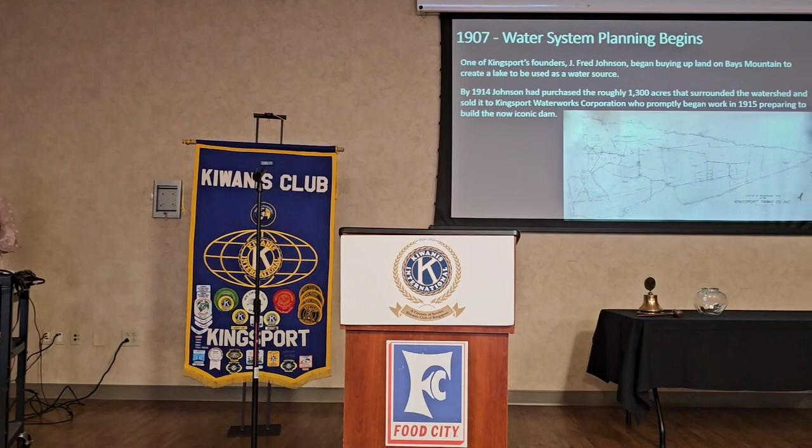So I've been with the city 25 years, but the city water department started back in 1907 when J. Fred Johnson, one of our city founders, started to purchase property and buy 1,300 acres of land up on Bays Mountain for a water system.

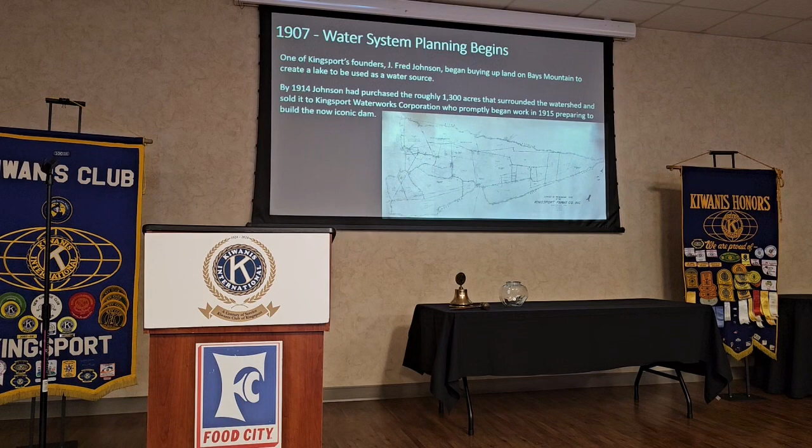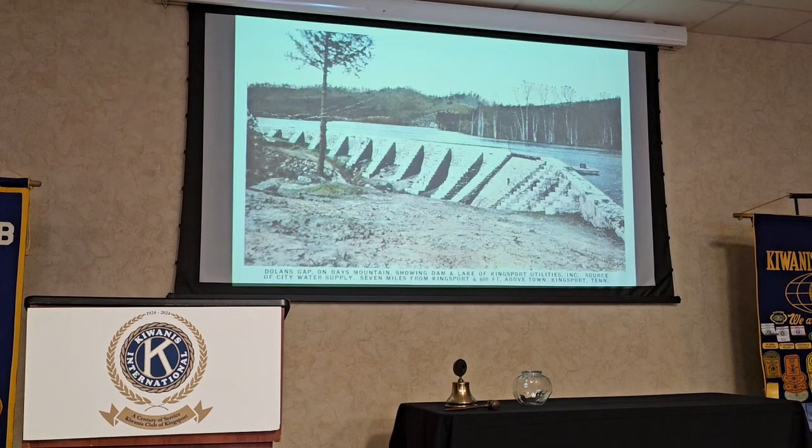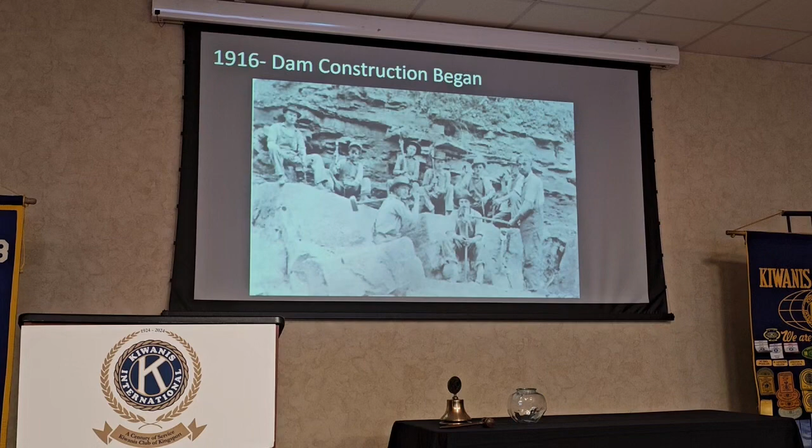Going back through old articles, it was mostly due to the wells down here in the city, and a lot of those were going bad and wasn't sufficient water quality. So they started looking up on the mountain for a good water source, and so they surveyed the area between Bays Mountain and the Holston River Mountain, and did the convergence. That's how they decided where to put the dam there at Dolans Gap.

And that was the Kingsport Waterworks Corporation. It took them 2 years to build the dam. The first year they built the dam, and then the second year they decided to come back and started putting these abutments in. It's been said that it took them 2 years to do that.

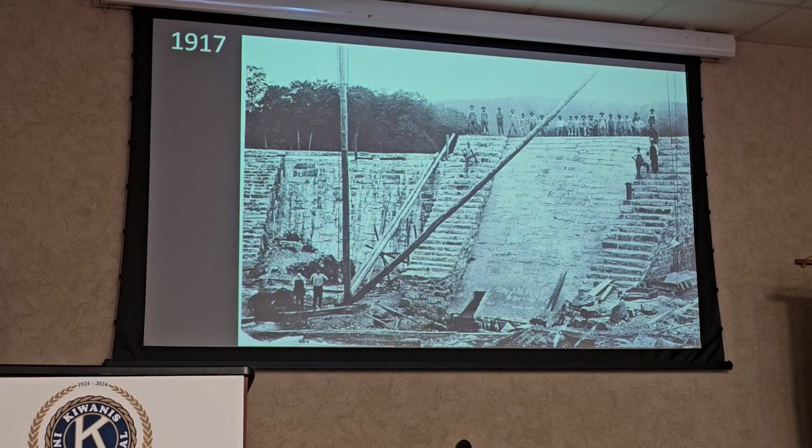That was in 1916, and then in 1917, water began flowing down from Bays Mountain in a 10-inch pipe down to Kingsport. Part of that 10-inch pipe is still in service. We actually had a repair on it about a month and a half ago, so we do have infrastructure in our system that is that old. So 4 months later, after the water began to flow, the City of Kingsport was incorporated.

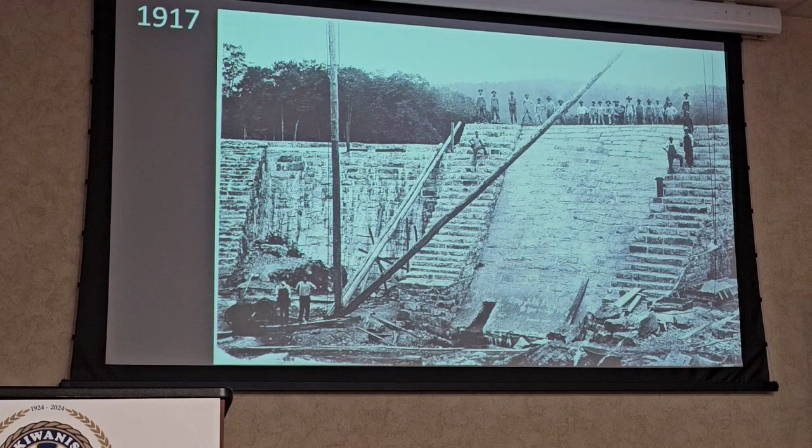The dam is about 600 feet above the City of Kingsport, and the lake is 35 acres. They had a series of pressure-reducing valves coming down the hill, so you can imagine the amount of pressure 600 feet above and what the pressure would be at the bottom. So they had a series of pressure-reducing valves to moderate the pressure. And I don't think that was super reliable for them. They would have days where they would have a whole lot of pressure and days where they'd have very little pressure, and then other days where they'd have no water at all. So it's a far cry from where we are today.

In 1919, due to taste and odor issues, the first water plant was constructed on Bays Mountain. It was about 345 feet below the dam.

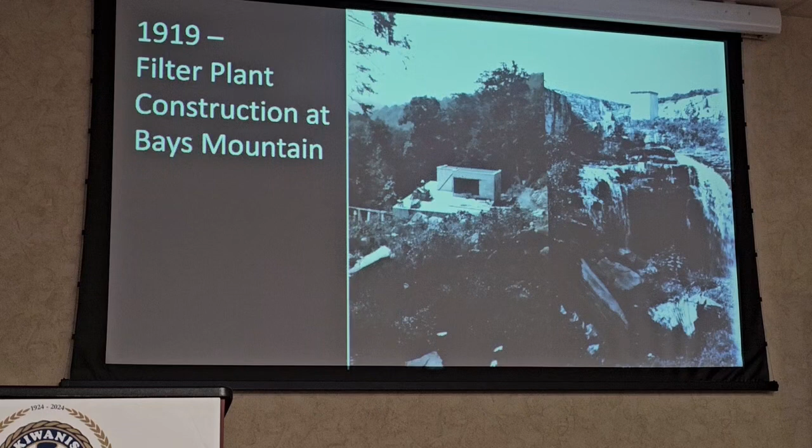Reinforced concrete, it was 3 stories high. Filters could filter about 1 million gallons a day, and it was said to have enough supply for 3,000 people. So speaking of horsepower, it took 63 tons of reinforced steel and 10,000 bags of concrete.

All of that came up the mountain through horsepower. So how many horsepower do we have here? What was that, 44? 44 horsepower.

So it was also interesting. I really had a hard time. I did a presentation on this about a month ago. But when I was putting this presentation together, I really had a hard time getting off the mountain and down to the water treatment plant because I just had all these articles that you would read through.

It was so interesting. So there were several residents that lived up on the mountain, and a lot of them would just pitch in and help during the dam construction. It was said that those folks used their horses and mules to help get the stuff up the mountain. It's a lot to say that back in 1916, 1920, having running water was a luxury, and now it's taken for granted.

It was said that this was the most difficult part of the dam construction. There were 2 operators on the mountain, Robert Rufus Nelms and his wife Ruby lived there, and Ruby's father G.A. Barlow all lived up on the mountain, and they actually had a cabin up there. That was not uncommon all the way up probably to the 1950s, 1960s. It wasn't uncommon for operators to live at the plant so they could monitor it and start the plant up during the day and shut it down in the evening.

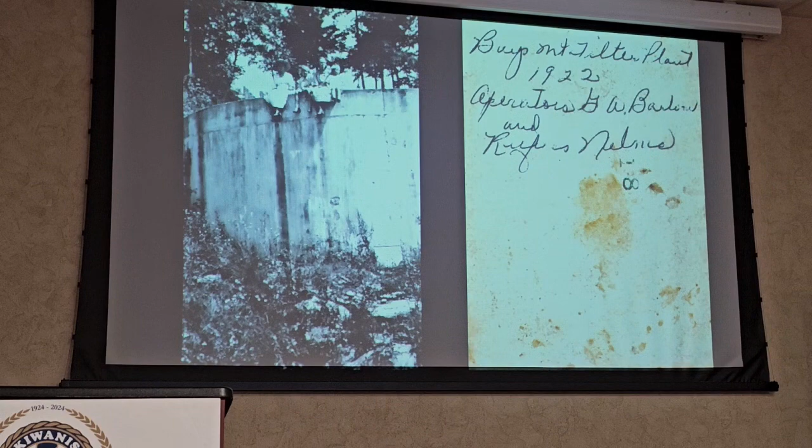Again, the old pictures to me were super interesting. So this wash water tank, that's how you backwash filters. You got to clean the filters once the water goes through. Backwash is utilized to clean the filters.

I can't imagine what it must have been like to live there during this time with the number of people that were there. What a great opportunity that would be. We pay big money for that now.

So in 1926, Kingsport Waterworks sold the water system to the city of Kingsport for $300,000. Weidman and Singleton did the engineering for it. At the time, we had 1,200 customers, and by 1928, we added an additional 800 customers.

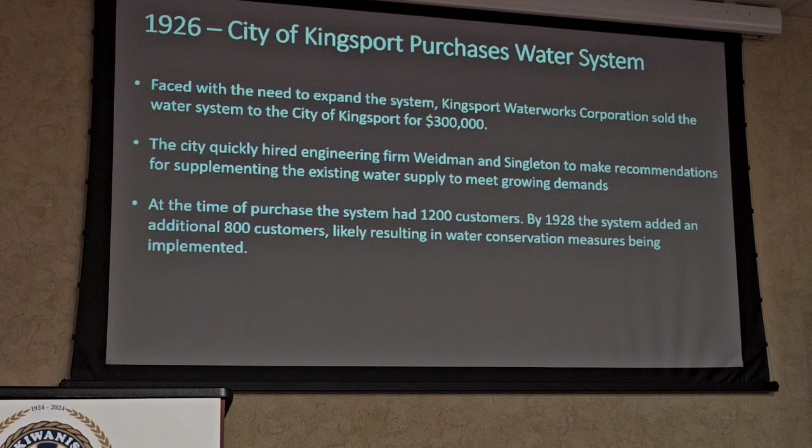A lot of the old news reports recorded a lack of water. There would be days where we would have to do water conservation. I ran into an article from 1925 that referenced back that we hadn't had to have a water restriction since 1925. This was a big deal, that's a lot of growth.

What's interesting to me was the amount of public involvement that they had. They had a meeting at the Y. They did a presentation, everyone voted on it, and they said yeah, this is absolutely a go.

Part of that new expansion, the new plant, would be a 1 million gallon water storage tank. We call it Cemetery Hill, but it's at Oak Hill Cemetery. There's a water storage tank on Oak Hill, and it's still there today, and we still utilize it, though it's been rehabbed a couple of times. We're still utilizing that same infrastructure that was put in 1928.

Capacity was 2 million gallons. Also, if anybody is a big history buff and aware of anything about this, Borden Mills donated the land to the city for the water intake. They had mentioned building an emergency intake, an emergency water treatment plant at Borden Mills, but I couldn't find any other reference to that other than in one article. So if someone is aware of something like that, definitely let me know, because I had never heard that before.

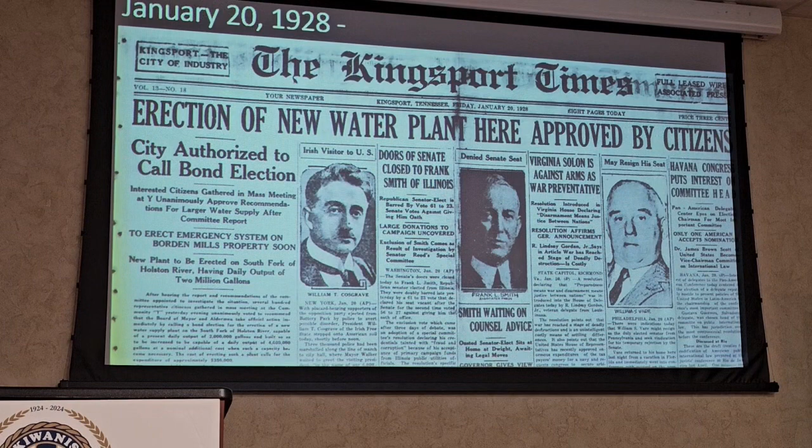So in 1928, construction began. The project was split into nine bids. That was very interesting. What was even more impressive to me, there were 45 bidders on this project. I don't know how many people do construction in here, but our last large construction project, we had 2 bidders, and it was for $6 million. And so you're looking at $400,000 worth of work, the plant was $400,000, and there were 45 bidders. So that was super interesting.

Also interesting enough, beautiful, it's amazing to me. It goes back to how important water was when water plants and distribution systems and getting water to people's homes first began. There was a lot of pride taken in that, and you can see that in the construction of the plant, the arched windows, the filter controls were marble. If you go to places like Nashville and Omaha, it's absolutely architectural, it's beautiful. You don't get that now, it's too expensive. Now when you do get a plant, it'll be a membrane plant, typically a steel building to keep costs down. But I think that's amazing to me.

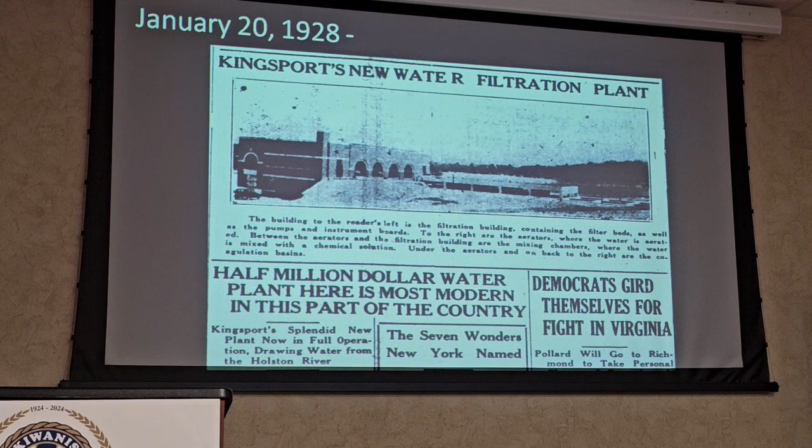Also, when I do this presentation, I struggle with it. I love what I do, and I love water, and I have a hard time making it interesting to other people. So, matter of fact, in my last presentation, they thought this was going to be like watching paint dry. So hopefully that will not be the case for you.

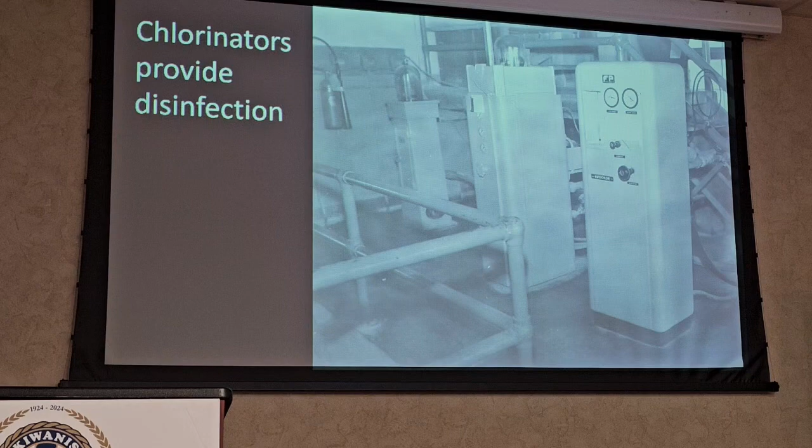I'll just go through a series of pictures here. These are our first chlorinators. This is how you feed chlorine here in the plant. Those are no longer there.

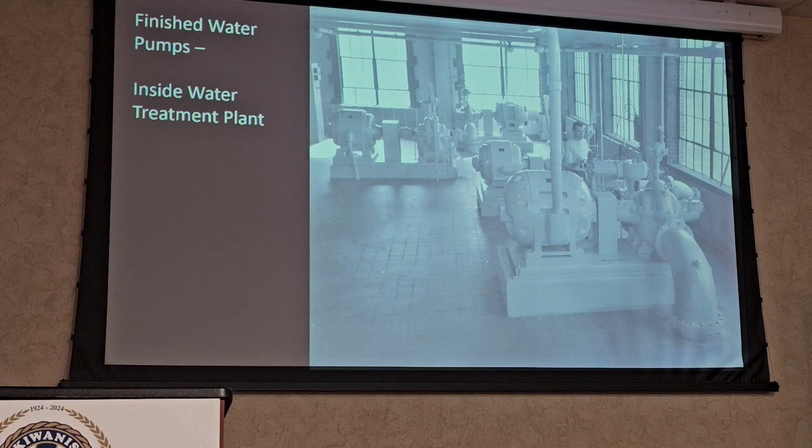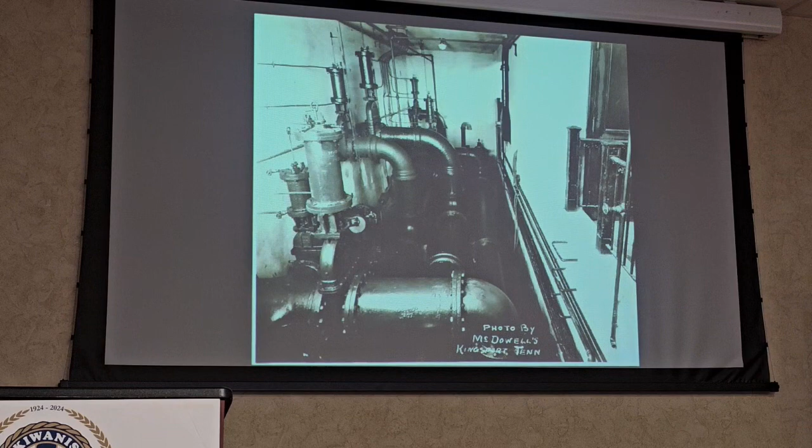And those pumps there are distribution pumps. So once the water was treated, those pumps there were used to pump water into the system. This is a filter gallery. Not all of that equipment, but a lot of it was there when I started in 1998. All those pipes are still there, but some of the other apparatuses aren't there.

So in 1943, there was another expansion. Again, it was just in time. We had to get the War Production Board to approve a request for materials needed for the plant. It took almost a year to get that approval. If they hadn't gotten it when they did, there would have been water shortages that summer.

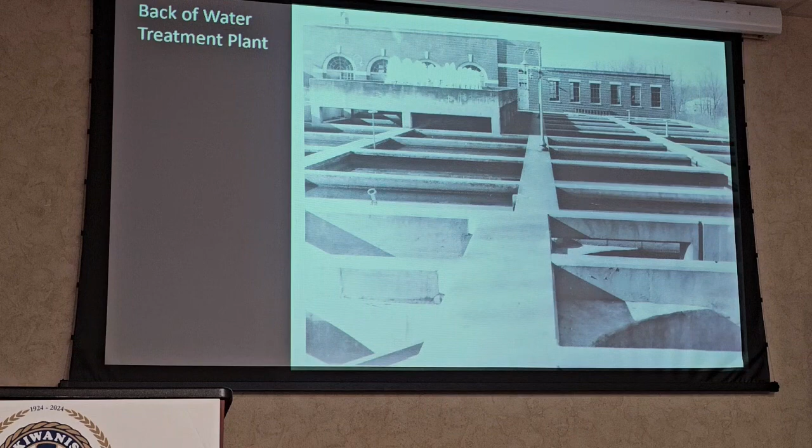Again, these are just older pictures from the water treatment plant. There's the aerators in the back during that time.

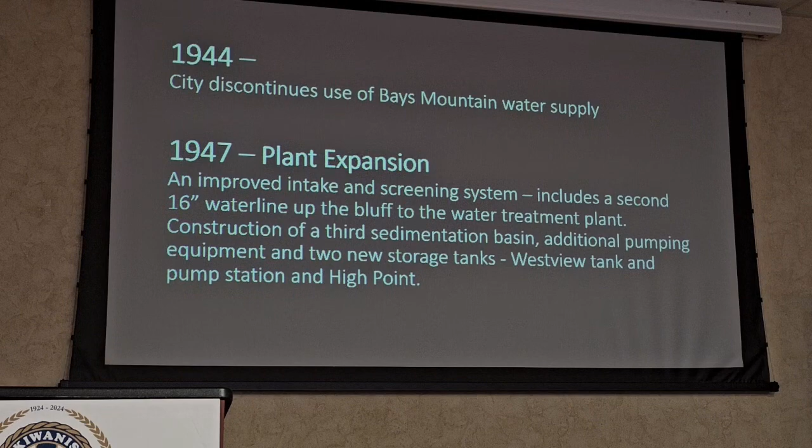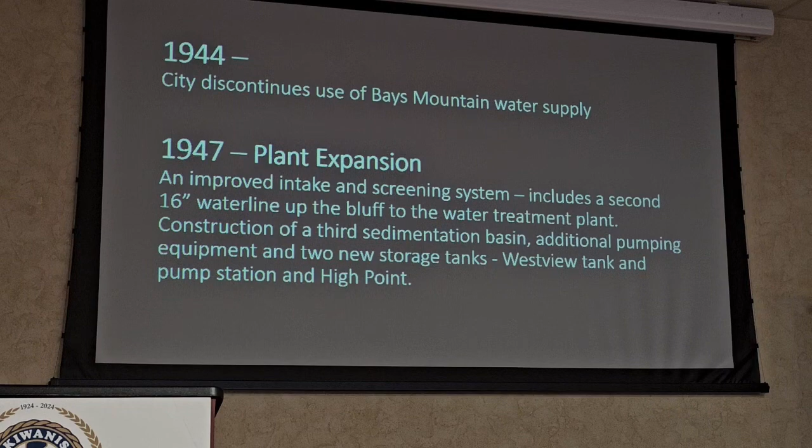So in 1944 is when we discontinued use of water from Bays Mountain. We did yet another expansion, adding a second 16-inch water line, the raw water line coming up the bluff to the water treatment plant. When I came in '98, we were talking about a project to remove those pipes and utilize a different conveyance system, and we finally finished that, I think, in 2016. So there's construction of the Westview water tank. That tank is also still in use, we've done a couple of rehabs on that one.

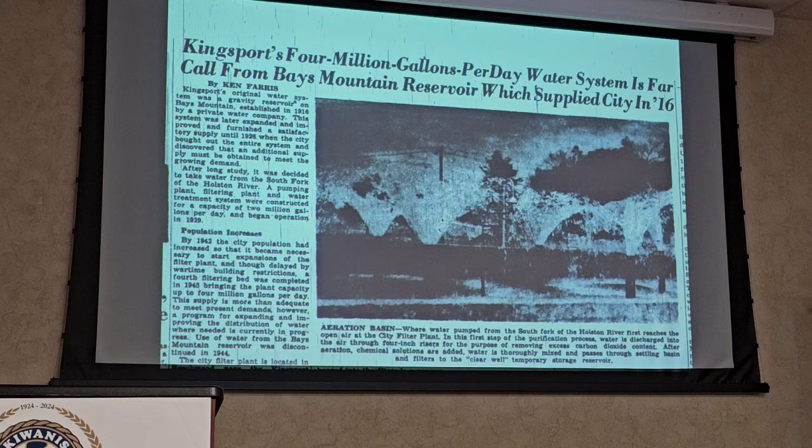There's two 16-inch lines, and then later in the 70s we added a third. But you'll see the project we did on that in 2016. That was a source of a lot of sleepless nights for us, because other pictures will show how steep that is. If we had had a break on that line, imagine how long it would have taken us to fix it.

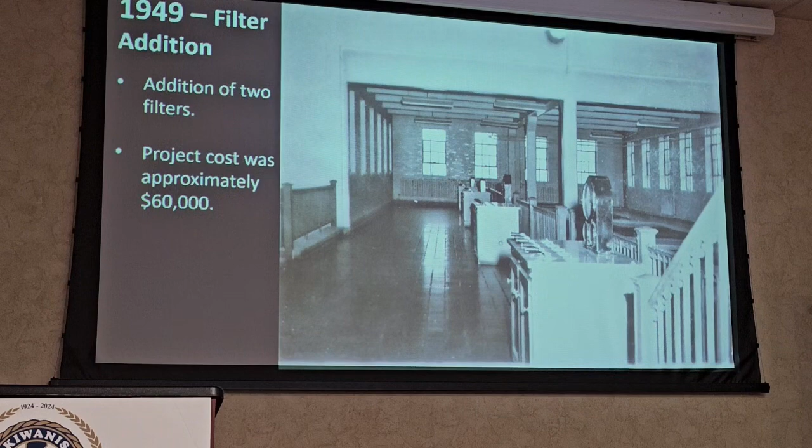Oddly, couldn't find any articles about it, but in the 70s there was a break there, and it took them 3 days to repair that waterline break. Also interesting to me, maybe not to you, the cost of these projects - $60,000 to add 2 filters, that's crazy. Things are so expensive now.

1954, we began adding fluoride to water. This was, at the time, one of the biggest city elections, best city turnout ever, and it was a controversial issue.

From the 60s, I guess, until 2016, it was just a series of improvements - adding a pump station, adding a filter. I tell everybody, now I know what you guys feel like when people like me talk about this, I was like, that's super boring. You added another filter, you added this, but it's all very much needed, it's just kind of repetitive. But again, they did an expansion at this time.

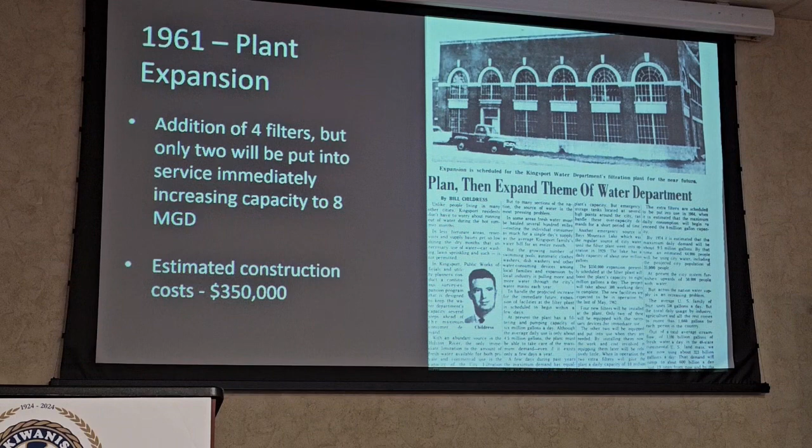In this 1961 article, the United States was using 323 billion gallons of water a day, and it was estimated that in the year 2000 it would reach 880 billion. But a quick Google search shows that we're only using 408 billion. So again, either conservation measures or really bad estimating.

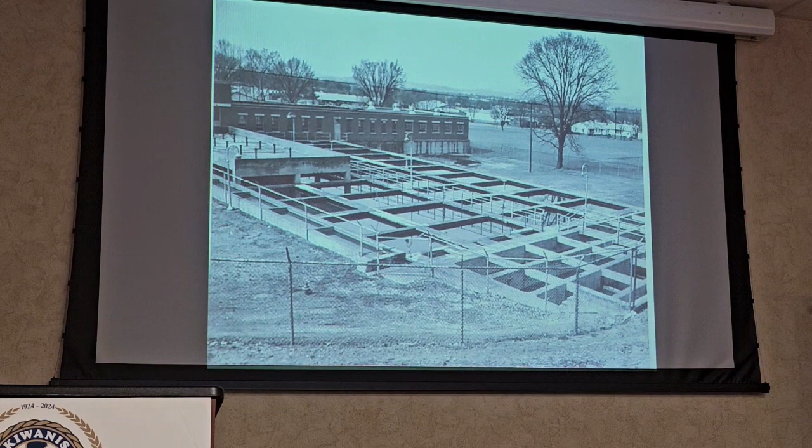So in the 1970s, we grew quite a bit, mostly due to acquisition of smaller utility districts. We had, I guess, about 6 utility districts that we took over during this time, and so we had to do additional improvements for that.

Again, there's the 30-inch raw water line that we added, sedimentation basins, filters. It was really the way Wiedeman and Singleton designed the plant - they always made sure they were able to expand. I think it was during this expansion they expanded it to add 4 filters, but they only put 2 in, knowing they could put the other 2 in when the demand for more water increased.

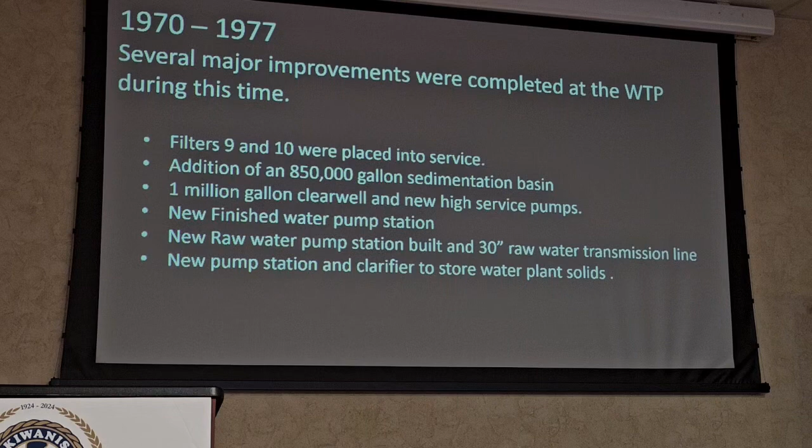So in the 70s, we were using an average of 7 million gallons a day. We had 225 miles of water line and 12,000 customers.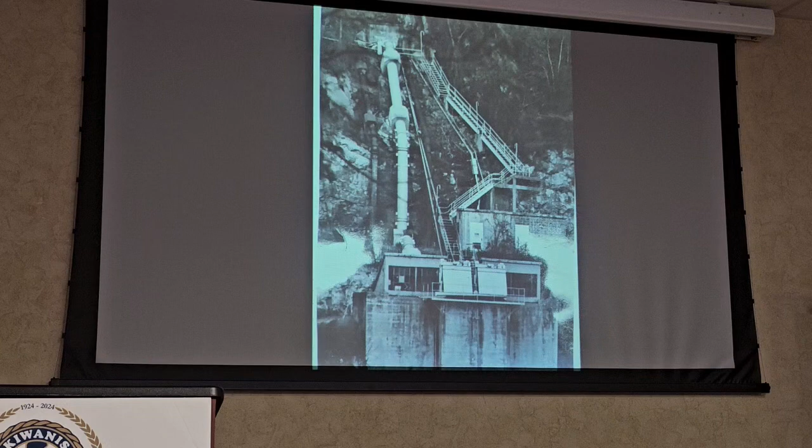Okay, so in the 1980s, yet another series. You can see the construction costs, we're at $2 million now. Different types of capital improvement projects, but the cost is increasing for the same type of improvements. In the 80s, we're pumping 12 million gallons of water, 19,000 water customers, and we have 15 water storage tanks.

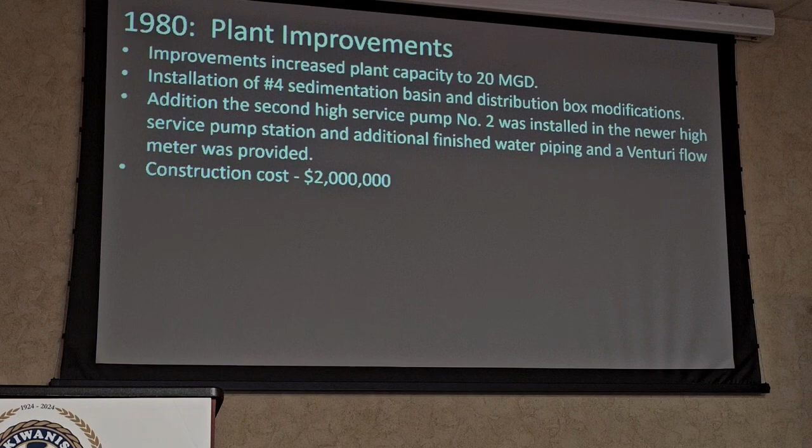Another expansion, I get it, this is boring, so I'm going to clip through this. I don't even have anything exciting to say other than we continue to... actually, that's not true, it's not exciting, but that's part of the problem with water and sewer. It's not exciting, you don't care as long as you turn it on and flush it and it goes away.

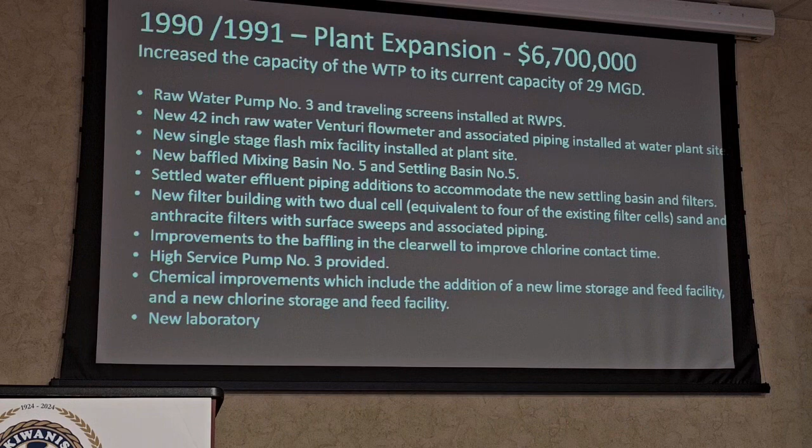So I will say that it gets very exciting when some of those things don't work. I shouldn't go through all the expansions, but to Kingsport's credit, they were always looking forward, always reinvesting, so that we were always ready for whatever was coming next. We've never found ourselves in a water shortage or some of these issues you're seeing hit the news these days. So it is boring, but it is extremely important.

Those are sedimentation basins. I did this presentation just on the history of how we progressed from 1907 to current day. I didn't go through the treatment, but these we call sedimentation basins. Once the water comes through, you mix the coagulant with it, and it kind of works like making a cake, put the cake batter in there. In the back you have flocculators, and it mixes it all up. Then when it comes through here, all your solids settle out, and all the clear water on top goes to the filters. So this is kind of the intermediate settling.

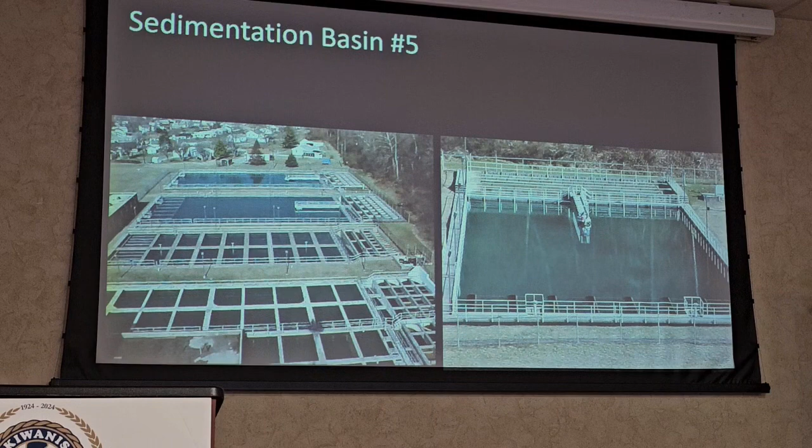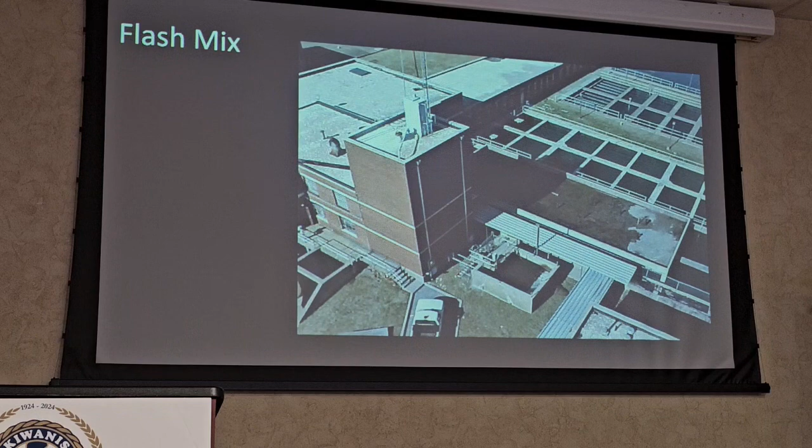And these are the raw water pumps and flash mix. When I came in '98, I thought that flash mix had been out there, that's where the mixers are, that's where you're making the cake. I thought that was always there. It wasn't.

So that's what the filter gallery looks like now. You can see the updated controls. I wish I would have took a picture of the old controls. We still have one, we kept one just so that people could see the marble stand and that sort of thing. I think when John was there at the time, you were required to make sure that we kept one of those.

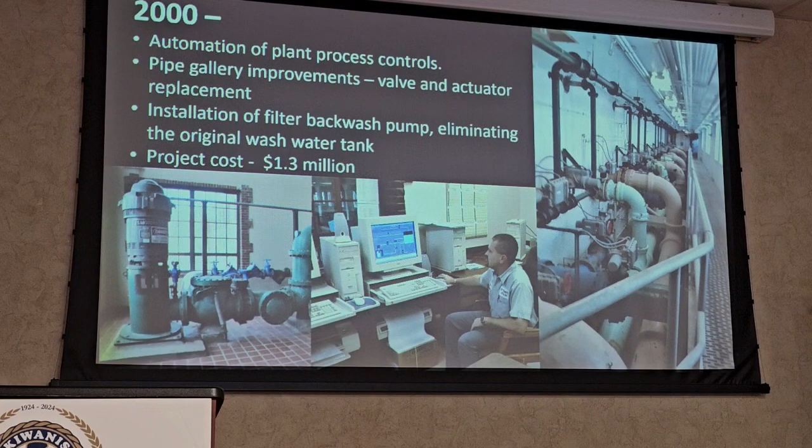In 2000, we really started seeing a lot of automation in water treatment. We just recently completed another upgrade in automation 3 years ago with SCADA, and you'll see a lot of that now. You probably hit the news a couple of months ago about cybersecurity - that's where all your risk is. Filter plant improvements, gallery improvements, and we did a huge residual projects.

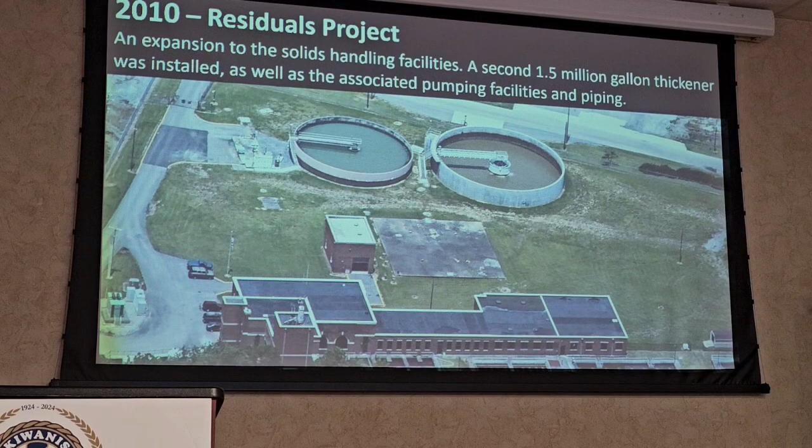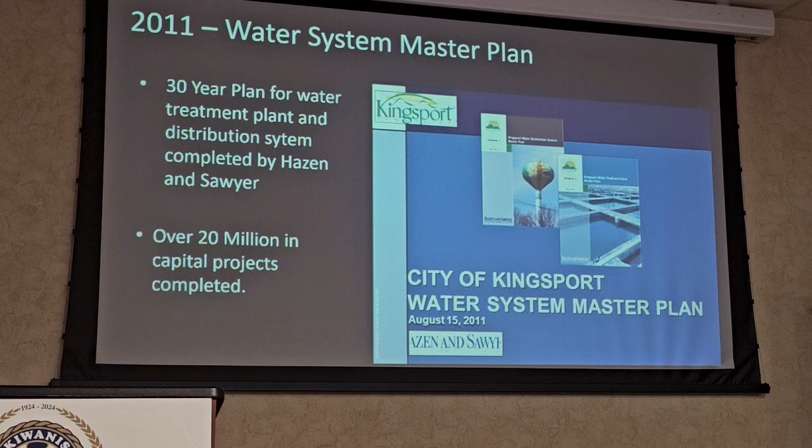2011. To me, this is one of the better things that I've been a part of since I've been at the city and a part of the utilities department. We did a water system master plan. We wanted to make sure we knew a lot of improvements needed to happen and they were coming. So we wanted to look at a 30-year projection, see what our population projections and demands were going to be, so that we went forward through our capital improvements plan without upgrading something in the middle that turned out to be the catch point for something that should have happened before. We went through this whole process. We're still utilizing it today, still doing projects out of it today. We're going to do a small upgrade or revision of the plan this year, go back, make sure we're still on track. But we've completed about $20 million worth of projects.

So this is super interesting. I don't care who you are. I don't care who you are.

So I showed you the raw water intake and the raw water transmission lines coming up the bluff under John B. Dennis over to the plant. Ron and I talked about this project for years. They were talking about it in 1998 when I came. Two studies, and then this was the first project out of the master plan. So we had to figure out how to get the water from the river to the plant with reliability, redundancy, and with as little risk as possible.

Essentially we had kept the same intake. We did a 24-foot vertical shaft, and the water comes into this shaft, and then we tunneled 1,100 feet under John B. Dennis, got away from the lines, and now it gravity feeds over to the water treatment plant, where we have pumps that lift it up at the water treatment plant. We have pumps there that have lifted it 130 feet from the ground, underground, up to the plant.

And then we added additional pumps. Again, reliability, redundancy - we've added a fourth pump. We have 4 raw water pumps. It takes 2 to meet our demand. So if we have one pump go down, we still have two there to help us meet demand, or if we have to take one out of service for routine maintenance, because you just never know. You could take one out of service, the other one go down, and it takes way too long. With the supply chain issues that we have now, nothing happens overnight. It will take us probably a year to get one of those pumps back. If we bought one today, it would probably take us a year to get that pump in. So the cost of this construction was $14 million.

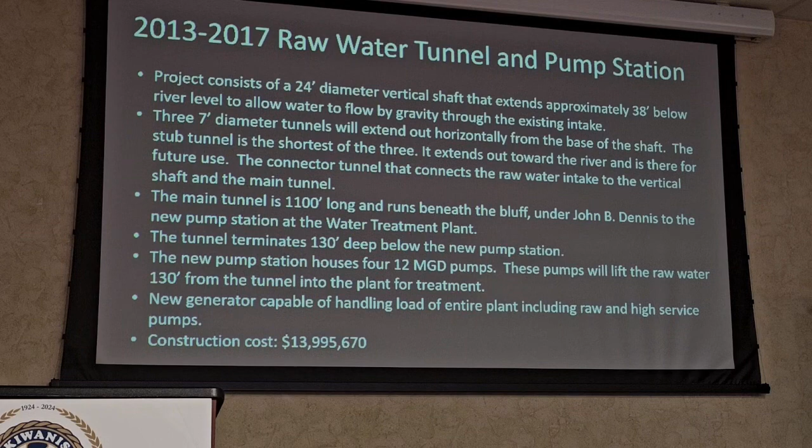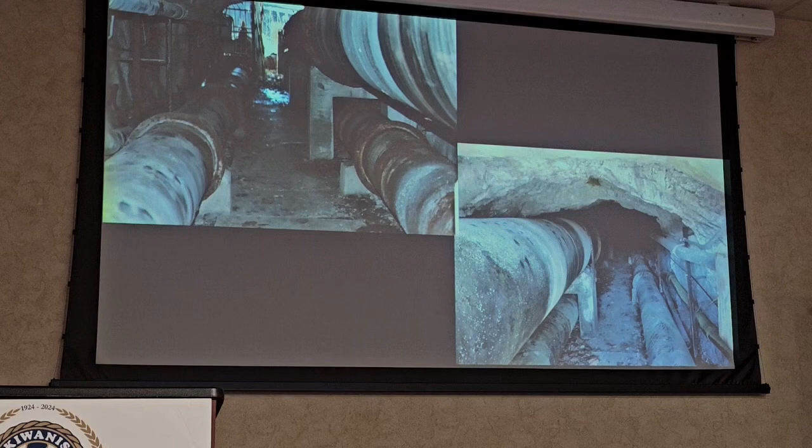I've never been involved in a blasting project before. There was lots of dynamite used in this project. It was fun.

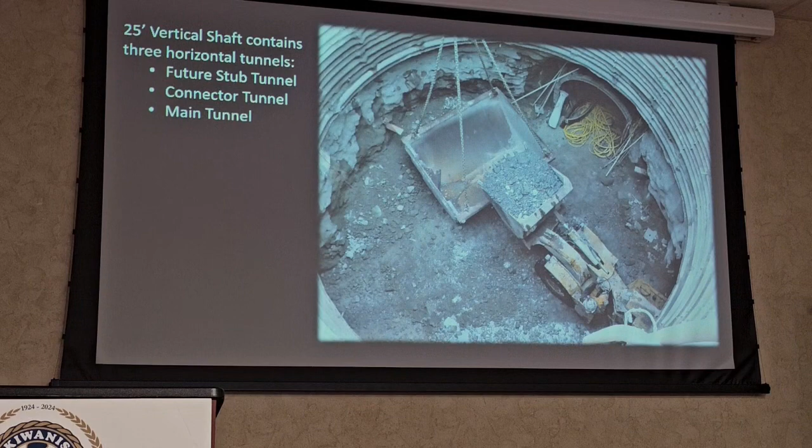Again, it was great - I was able to go into this tunnel. This tunnel, I hope, will never be empty again. If you were one of the lucky ones that got to take a walk through the tunnel, it was just an amazing experience.

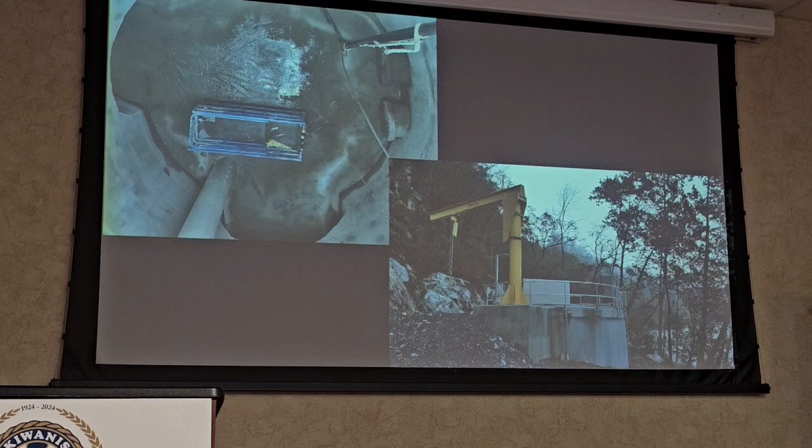That's the vertical tunnel completed inside and out. You see the difference. Some of the miners - they were a great group of guys.

So that pipe running up above, that's ventilation. That's a picture as we were tunneling underneath.

And this is at the plant. This is when we're drilling the vertical shafts - these are for the pump shafts. We did this at the same time that we were tunneling towards the plant, and we were also doing the vertical shafts at the same time.

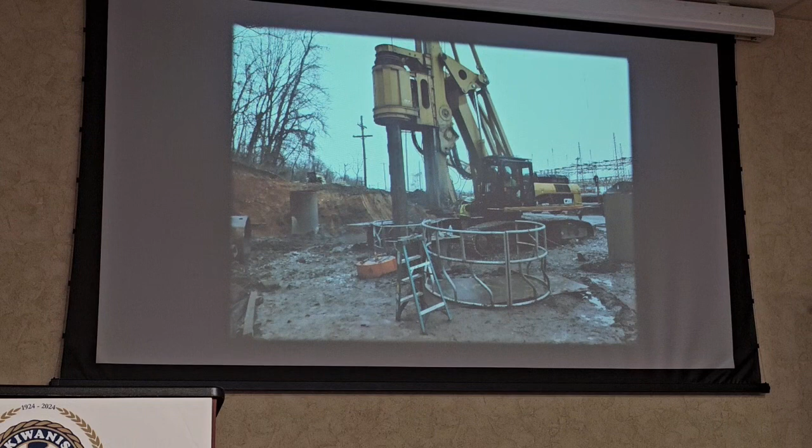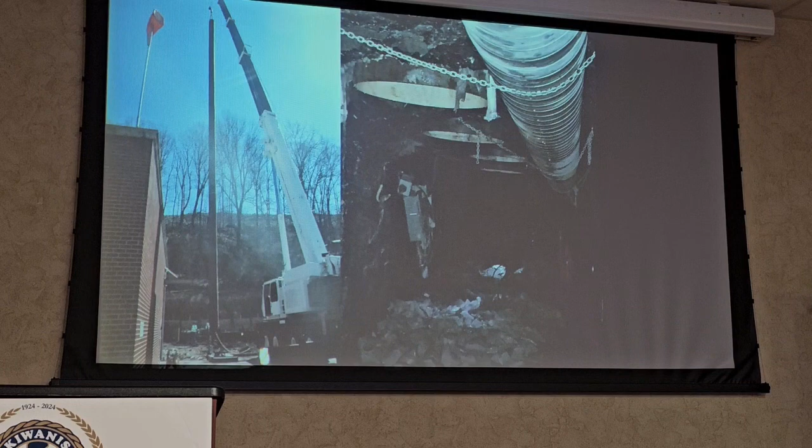Again, that's one of the 130-foot shafts. Actually, that's the sleeve that goes down. This was extremely nerve-wracking that day. To the very left of that shaft is our chlorine building, so we were all like, 'Oh, please don't drop it on the chlorine building.'

And that's our raw water pump house now. It's got 2 sides - a pump side and an electrical side. That's also very new to water treatment. It's so sensitive now - all the space has to be air conditioned because the electronics can't take the heat.

That feeds the raw water pump station. You have a generator. When we did the generator at this project, we looked at having 2 feeds coming in from AEP so that we wouldn't need the generator. We had a lot of conversations with AEP, and they were great. They said, look, if you're on the most reliable one, if you lose the most reliable one, the other one's not going to be there for you. So we opted to put in a generator. So no power issues, then we can operate 24/7. It has, I think, 3 days worth of fuel storage.

So today we have a capacity of 28 MGD. We're averaging 17 million gallons. We have 22 water storage tanks that'll hold 18.4 million gallons of storage out in the system, 858 miles of water, and 39,000 customers.

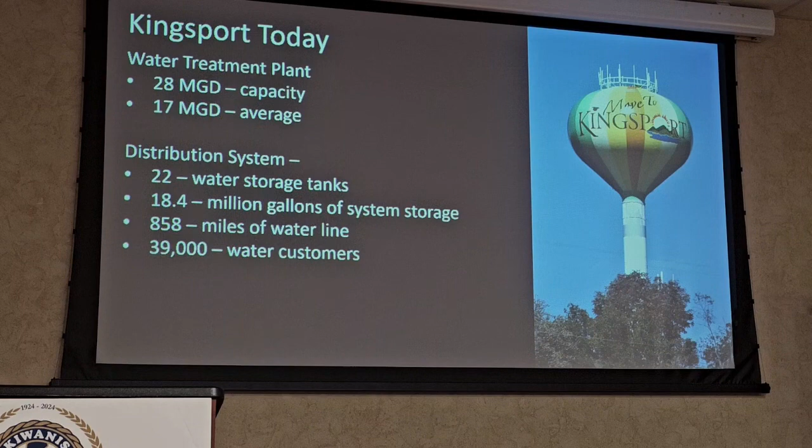Our water storage tanks are also inspected every 5 years from a third-party engineer. And so from those reports, we'll have improvement projects come out of that as well. So we're continuing to reinvest, continuously reinvest.

So the next phase, we have 2 big projects going on now. These are not the only 2 projects that the utilities department has on, but these are probably 2 of the biggest. We're going to go towards the high service pump station. The high service pump station are the pumps that pump finished water out into the system. And we're going to add a 4th pump. That way we'll have the redundancy. Again, we utilize 2 pumps. One of those goes down, we have 2, and then we're just holding our breath that everything gets back online before we get the other. So with the 4 pumps, we make sure that we can pump water at any time.

Again, the cost of this, $8 million. Also a new climate-controlled electrical room, and you'll see why.

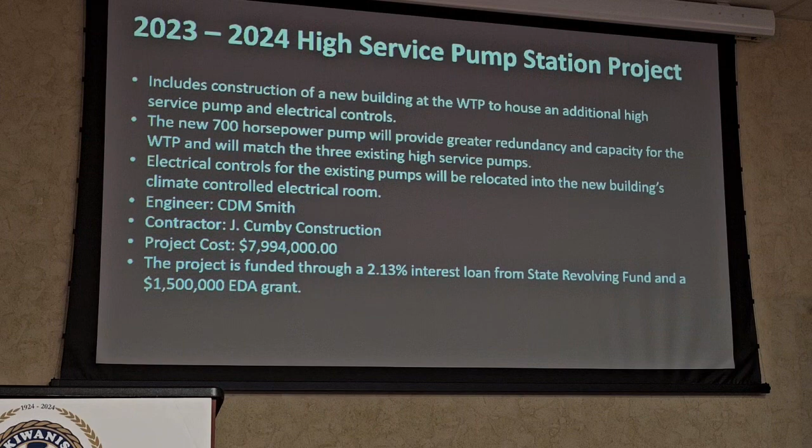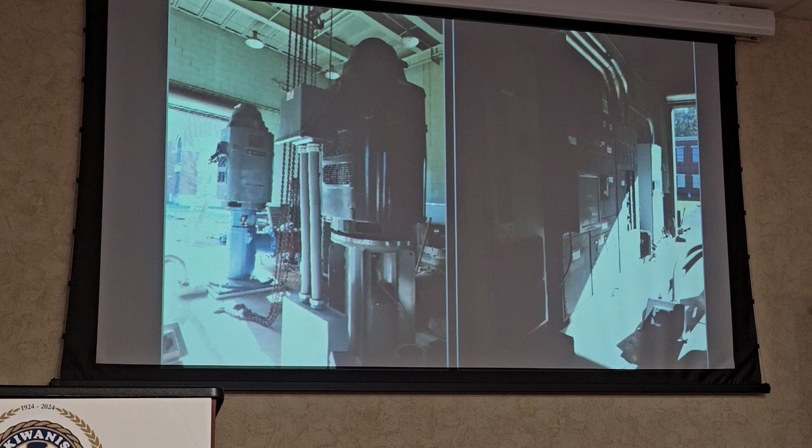There's an overview. But this is the current pump station. You can see the old electrical equipment. It's in the same room as the pumps. The new electrical equipment, drives, those sort of things can't take that heat.

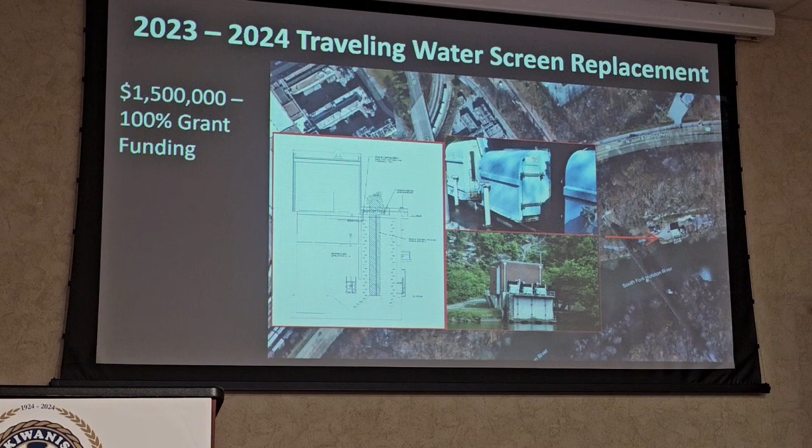Love this project. 100% grant funding. I have never been involved in a project in utilities that we were able to get that kind of funding. The state of Tennessee has really allocated, I think it was $3.2 billion, don't hold me that number, and dedicated that strictly for water, sewer, and stormwater projects across the state. And we received over $16 million worth of ARP grant dollars for that. So there's some other smaller projects going on, a lot of those are planning projects, but 100% ARP and ARC funding. So very proud of that.

So I can't say it enough. As boring as this may be to most of y'all, it is unbelievably important. This generation that sits here understands that. My generation, the next generation, the generation after that have no clue. And so we have to continually educate them that it requires reinvestment. It takes care in protecting our resources. I didn't say anything about that, but in 1907, when they built the dam at Bays Mountain, they talked about how great the water quality and the quantity was that they had there, but the city outgrew it.